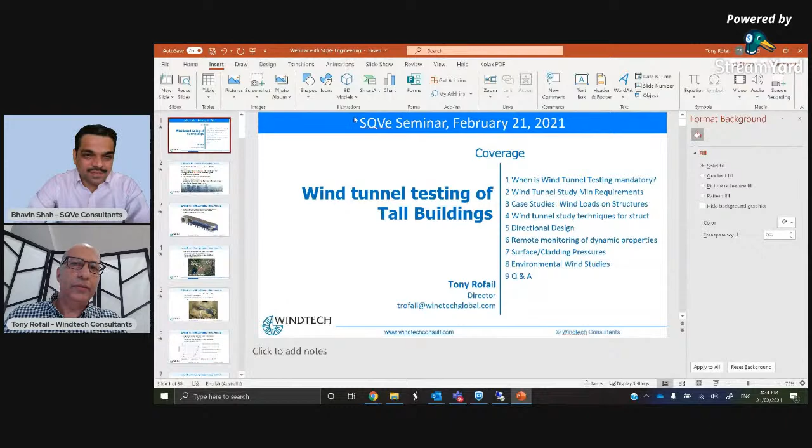Okay. Good. So you can see your screen now. I'm going to show you the overall structure of my presentation. Am I sharing my screen now? Your screen is showing now. Now it is there on the screen. Okay. All right. Good. So I'll just start now. All good? You can see the screen?

You can see that we want to cover a few topics today, all around the subject of wind tunnel testing for tall buildings. The first one, which is a very important question, is when is wind tunnel testing mandatory in India? Next is some basic requirements that need to be fulfilled when undertaking a wind tunnel study. Then I'll go through a few case studies, and then I will elaborate on some different wind tunnel study techniques for the study of the dynamic response of tall building structures, and which technique is best for what type of building. The fifth topic is quite important because it does impact the final result in a significant way, and that is how we account for the directionality in the wind climate.

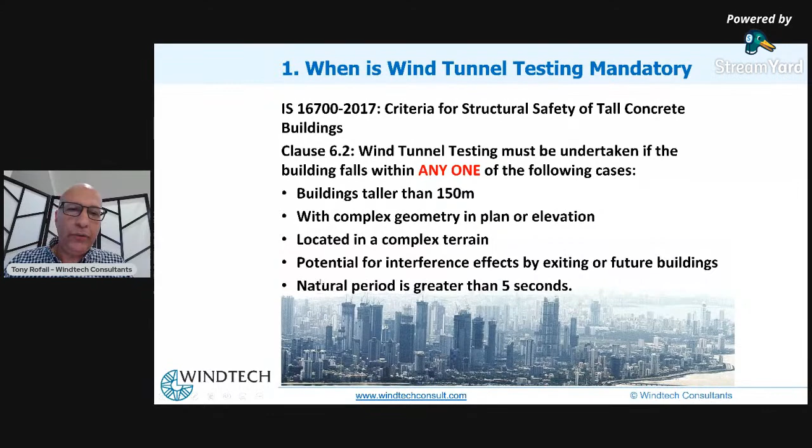Also, whenever the natural period is greater than 5 seconds, the crosswind response becomes very sensitive to the shape of the building, and the codes can't really accurately account for any small changes to building shapes, and hence the need for wind tunnel testing for that situation.

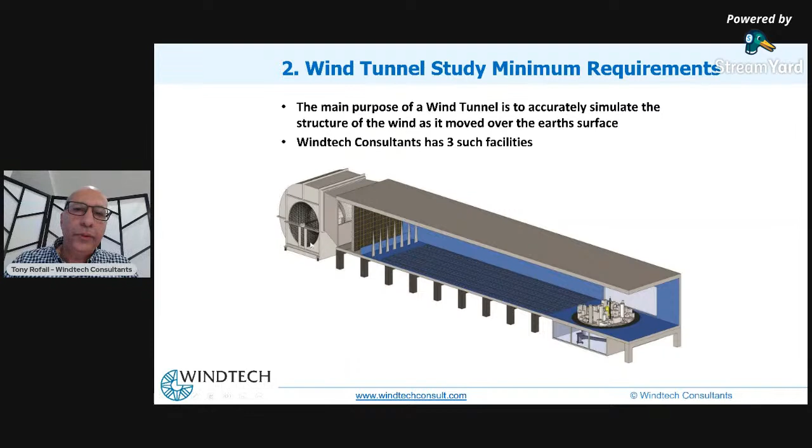Okay, so next topic is minimum requirements for a wind tunnel study. Firstly, I need to highlight what is the purpose of a wind tunnel. A wind tunnel's aim is to accurately simulate the structure of the wind as it moves over the Earth's surface. So this is one of the 3 wind tunnels at Windtech Consultants, this image here. And what is the terrain that we aim to match in the wind tunnel?

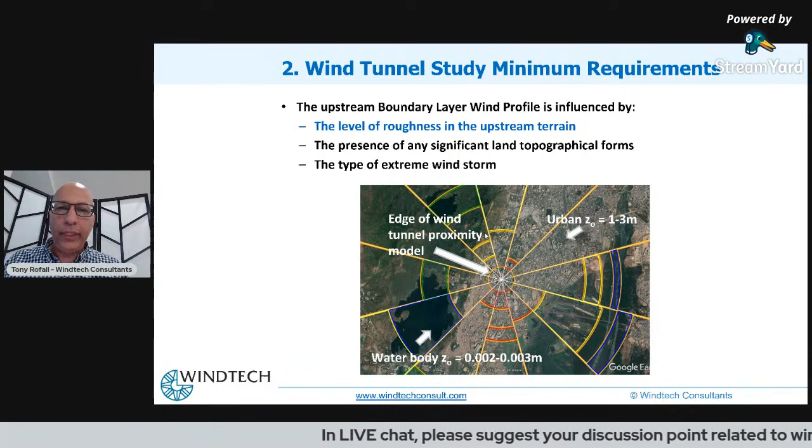It's very important for the wind consultant to be able to convert these different terrains into a combined wind speed profile, and then match this in the wind tunnel. So this needs to be done for different wind directions, and they're not, as you can see, necessarily all the same terrain. So it's important that the different terrains are modeled for the different wind directions in the wind tunnel.

Okay, if you are located next to a significant mountain or hill, then these are much larger systems and can't be modeled based on the limited size of a wind tunnel. So the solution is we do what is called a topographic study. This is a much smaller scale to be able to capture the full extent of these mountains and to see what effect they have on the local wind climate. So what we do is we then modify the local wind climate to account for the effect of these significant terrains before we do the testing in the wind tunnel at the normal scale, which is typically 1 to 300 to 1 to 400 or 500.

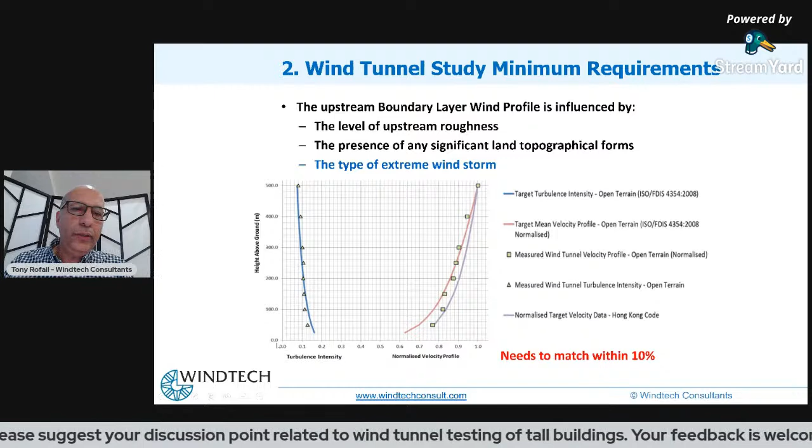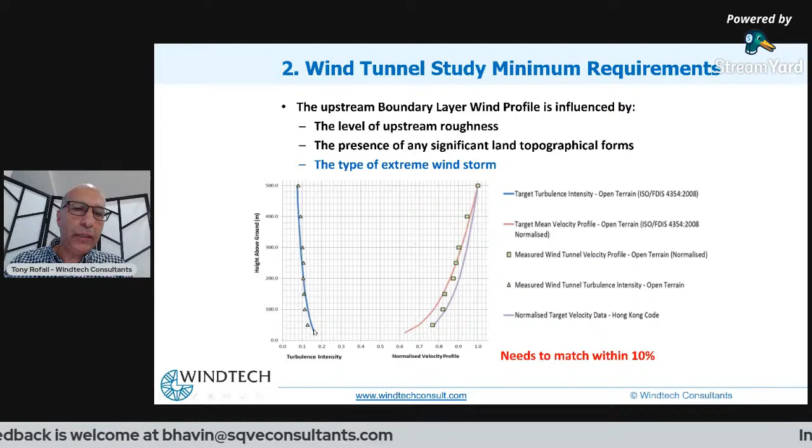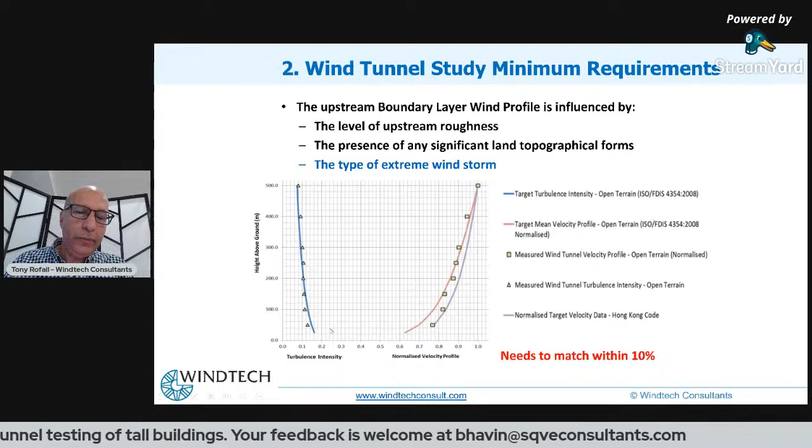Now in the wind tunnel, we aim to simulate some very key parameters that are in the real world. So this is the height above the Earth's surface, and this is actually the coefficient of turbulence intensity. You can see here, as we go higher above the Earth's surface, the turbulence intensity reduces, and the rate of this change in turbulence intensity depends on the upstream terrain that we are trying to model. So for this particular case, we have an open terrain, and we're trying to simulate that in the wind tunnel. You can see the triangles is the wind tunnel recordings against the benchmark value, which is the blue. And the mean wind speed also picks up with height, so different to turbulence. And that also needs to be matched in the wind tunnel. Okay, and these need to be matched to within 10%.

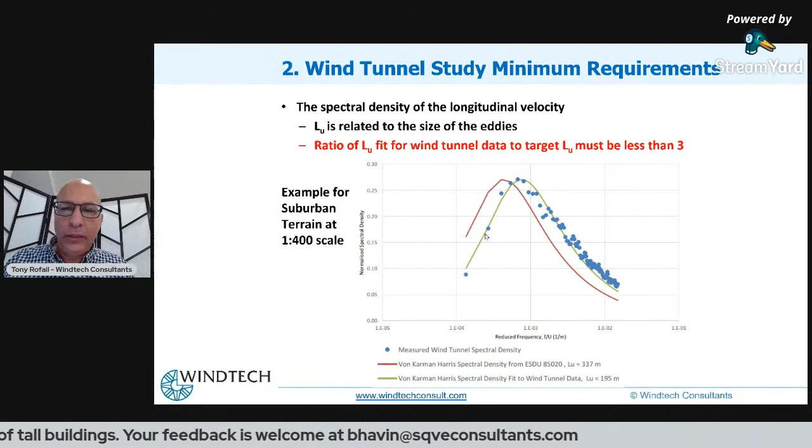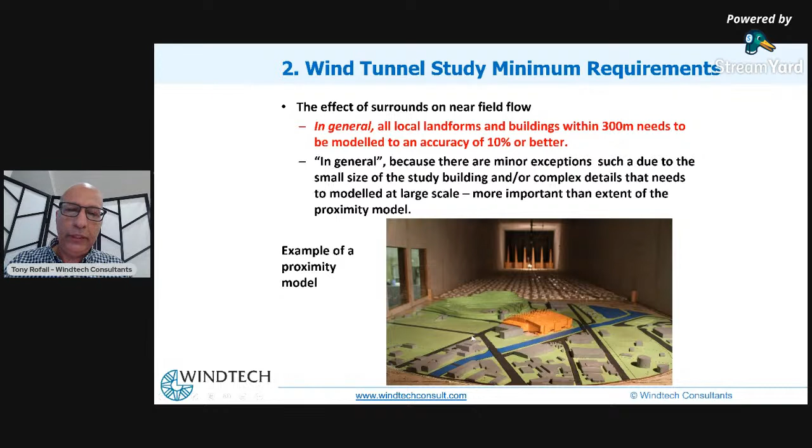Okay, the other important factor is the accuracy of the surrounds, the accuracy of the study model, and if there are any topographic features within close proximity, they should also be modeled. You can see this example here.

Another important parameter is that the cross-section of the entire wind tunnel model, including the proximity model, should not exceed 10% of the wind tunnel cross-sectional area. The reason for that is if it becomes much bigger than that, the blockage will start to influence our results. There will be a speed up at the test location, which would unnecessarily exaggerate the forces and pressures and speeds around the study model.

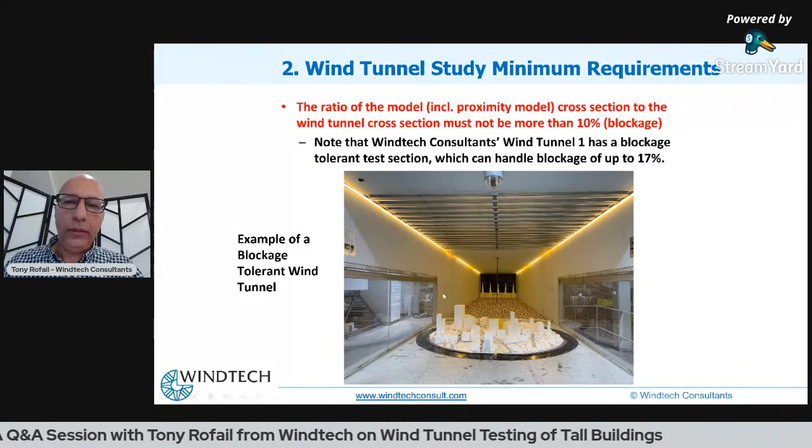Now, you'll see in the ceiling section here a very interesting detail, and this is called a blockage tolerant test section. So this is in one of our 3 wind tunnels. We have this feature which allows us to accommodate more than your typical 10% blockage because of the ability of these carefully designed slats to release some of the build-up of pressure at the test section due to large blockage. When the blockage is not large, it behaves like a sealed ceiling. Okay, so in this situation, we can manage a blockage of up to 17% of the cross section, although we rarely need to test scales that require this.

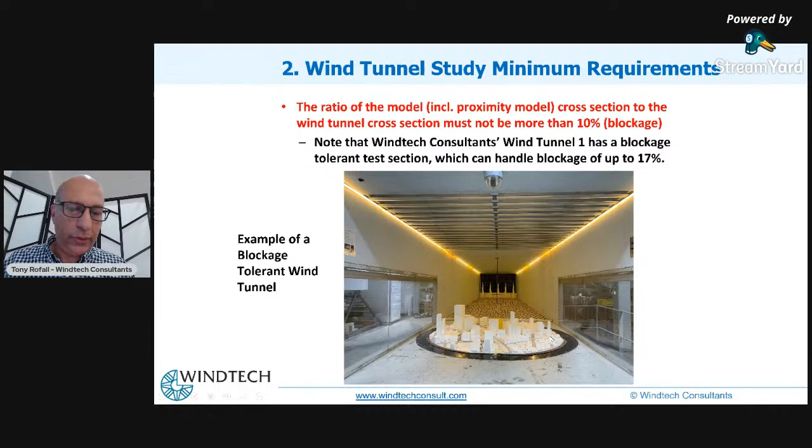Another important parameter is to have the model large enough, which is the opposite of what I just mentioned. So there is a balance between having the model small enough so it doesn't cause blockage, but also needs to be large enough so that it creates an accurate simulation of the flow regime around the building.

Okay, and the wind speed needs to be high enough. So this combination of wind speed and dimension, which is model dimension B, and mean wind speed in the wind tunnel U, and that's at building height H, divided by the viscosity constant of air is called the Reynolds number. So it's a very easy calculation, and any engineer could easily check the Reynolds number of the wind tunnel setup.

And a very important parameter is that this number must be greater than 50,000 for any cross section in plan, for any plan shape. For circular plans in particular, these are more sensitive to Reynolds number, and they would generally require a higher number than 50,000. Okay, and typically we recommend greater than 800,000. So these need fairly carefully planned experiments to ensure we get this much higher Reynolds number.

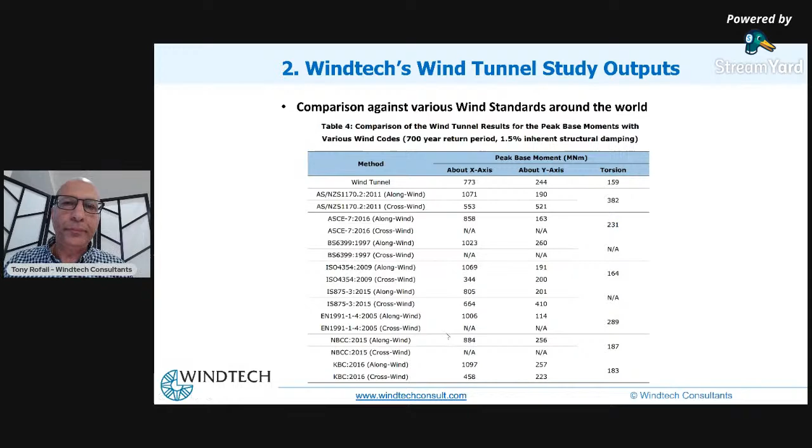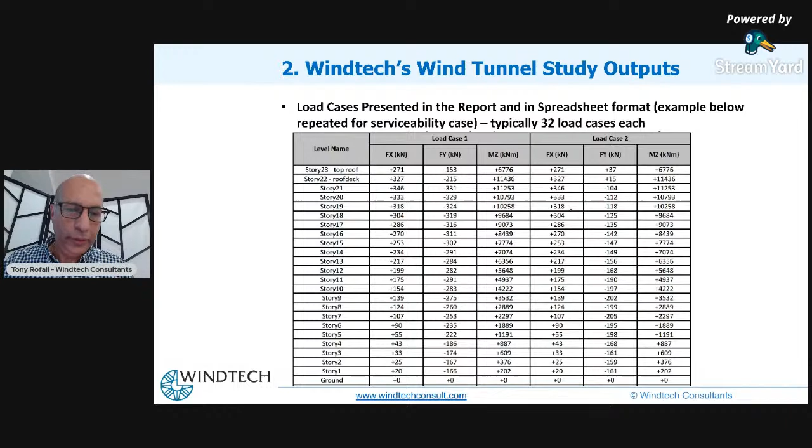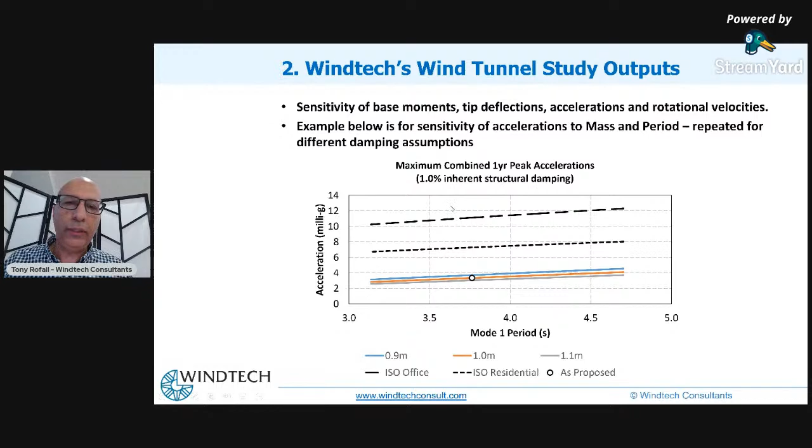Now we move on to a third topic, which is a number of case studies, some interesting case studies, and some of the lessons that we can learn from these examples. So you could see here, this is an interesting building in Australia. It's still currently the tallest building built.

It's called Q1 Tower. This tower has a sharp nose, you can see here, which is pointing towards the prevailing wind. And it's very aerodynamically shaped with respect to the prevailing wind. So in Surfers Paradise, the wind is very predominantly from the southeast direction. In addition, you can see some stepping in plan as you go up. These two features make this building form very efficient in terms of aerodynamics, and loads were relatively low for a building of this height.

And I'm seeing results for buildings shorter than that in the Gold Coast that are proposed, that are about 50% higher in terms of base moments. So it just gives you a bit of an idea how shaping a building for aerodynamics makes a big difference to the overall cost of the project.

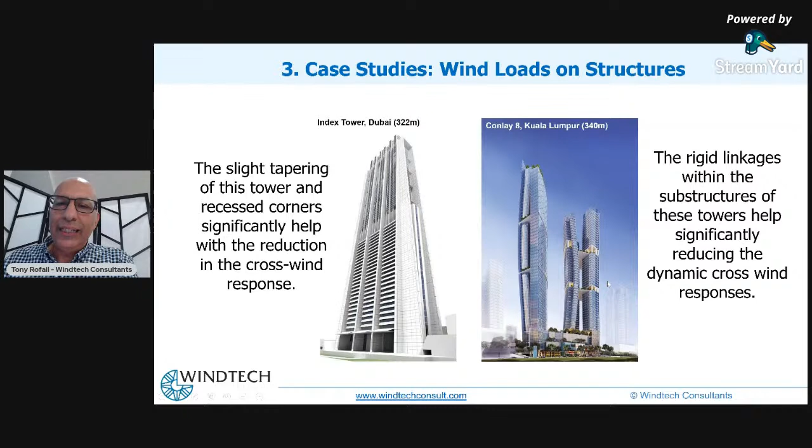So Windtech have developed what is still considered the state-of-the-art analysis method for accounting for this linkage between substructures. So we call each of these towers a substructure of the total structure. And this is largely because when the peak load occurs on one of these substructures, it hardly happens simultaneously with the other one. So what happens, the other one acts as a buttress to stabilize its mate, if you like, that it's connected to. So we tend to see significantly reduced overall dynamic responses because you're getting a much larger generalized mass engaged for a lower peak response.

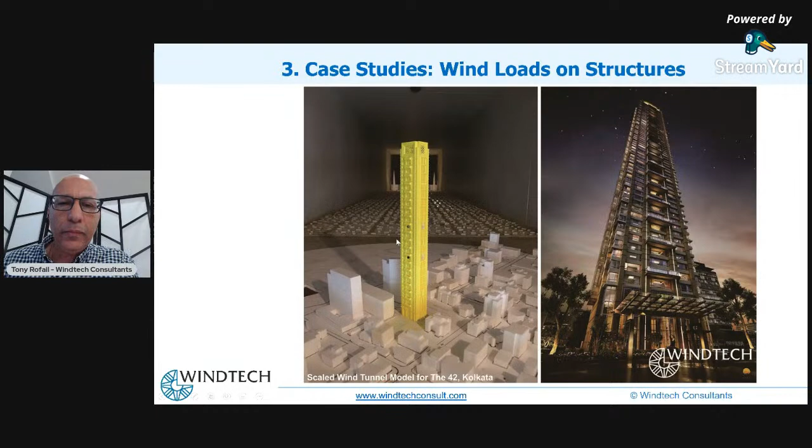Okay, this is an interesting, very slender tower in Kolkata, and you can see, apart from a little bit of a corner treatment here, we're not seeing any tapering, etc. As a result, we had an acceleration exceedance in this building, and the solution was a very simple and cost-effective damper design, which was implemented near the top of the building in the form of these two stacked tanks. These tanks could also double up as a fire hydrant tank for the building. So that's essentially very simple and cost-effective. If you factor in that this building would have had a fire hydrant tank anyway, then the cost is almost negligible for a damper.

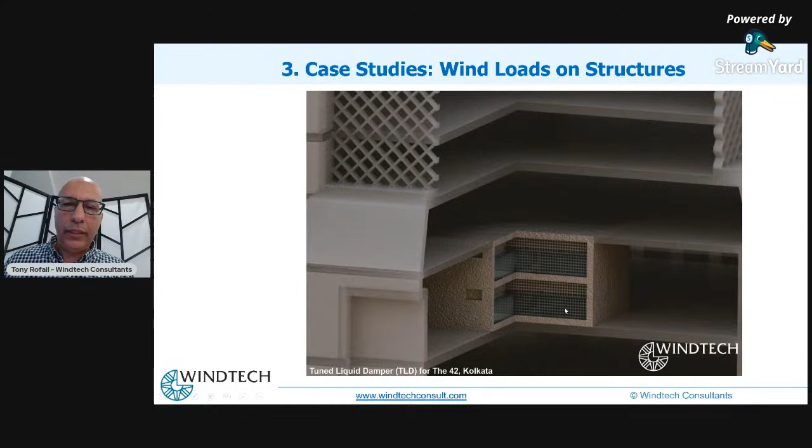Now, if you speak to other wind consultants, I know at least one, you would find that they would want to be pushing multi-million-dollar solutions, which would not be much more effective than this. Keep in mind that this system is able to mitigate accelerations in both X and Y sway modes simultaneously. It's a very clever system, very cost-effective. To achieve that kind of result with systems such as a tuned mass damper or hummingbird or whatever, you would be paying 5-6 times as much and not achieve, at least for the weight, a much better outcome.

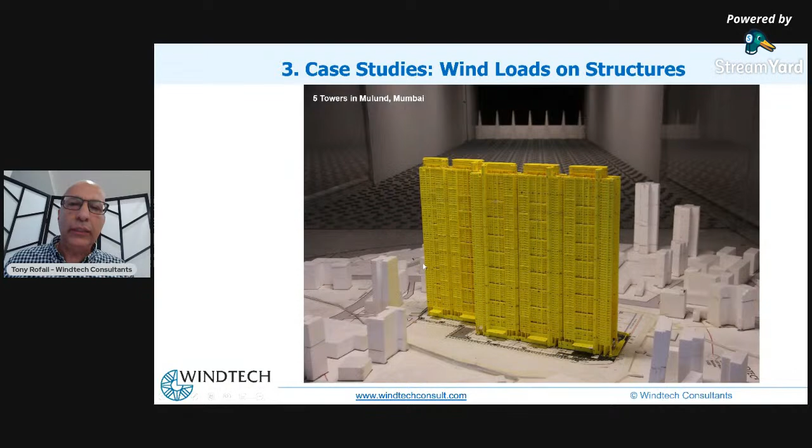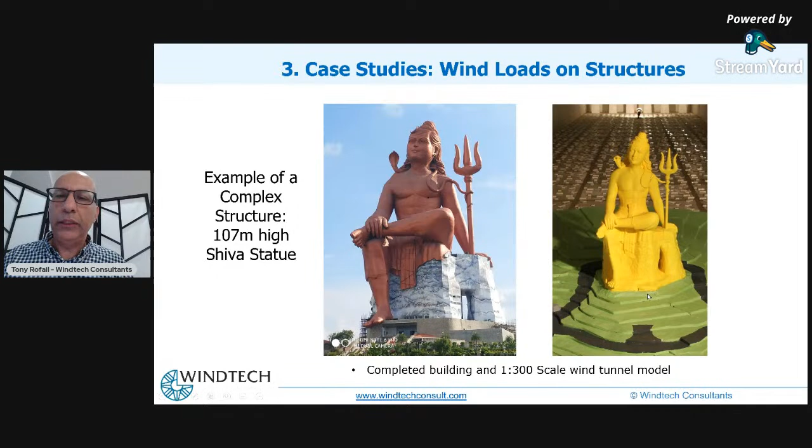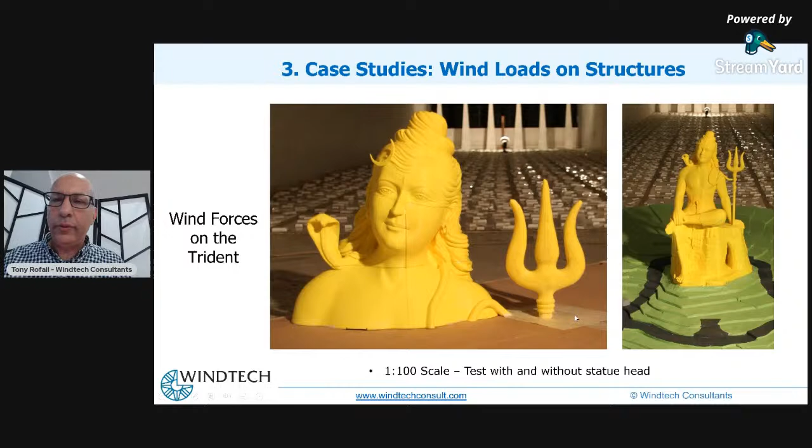You'll notice there's the Trident here. This Trident is not a structural connection to the building, so they were concerned about its dynamic behavior. If you recall, we would have an issue with Reynolds number here, because we have wind speed and dimension. The dimension here doesn't satisfy the Reynolds number requirement for accuracy of flow regime. For that reason, we needed to model that Trident at a larger scale, not ignoring the influence of the rest of the statue on the forces on the Trident head. So it's very important not to ignore modeling parameters such as Reynolds number in your wind tunnel studies. It's very important as a structural practitioner that you recognize these parameters for accuracy.

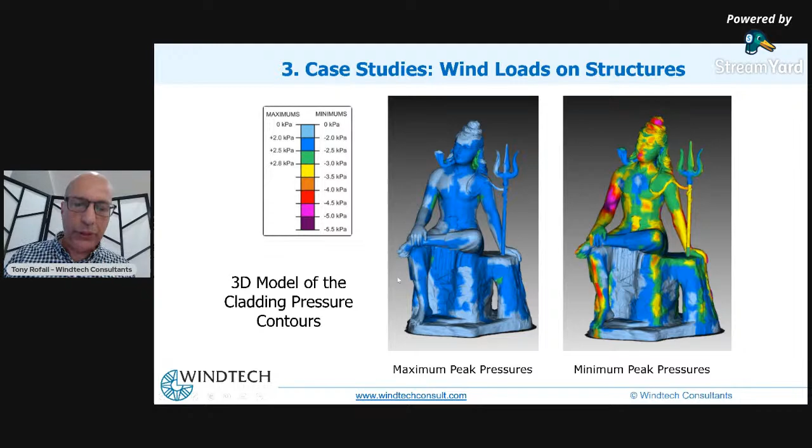You can see here, in addition to the structural response, we are able to provide the maximum peak pressure on the cladding and the minimum pressure distribution. These are global. For each point there, we look at the effect of 36 wind directions, and you get the largest peak value at each point, and that becomes a design value for cladding. Unlike structural response, where we look at the overall contribution of the pressure distribution on the load effects.

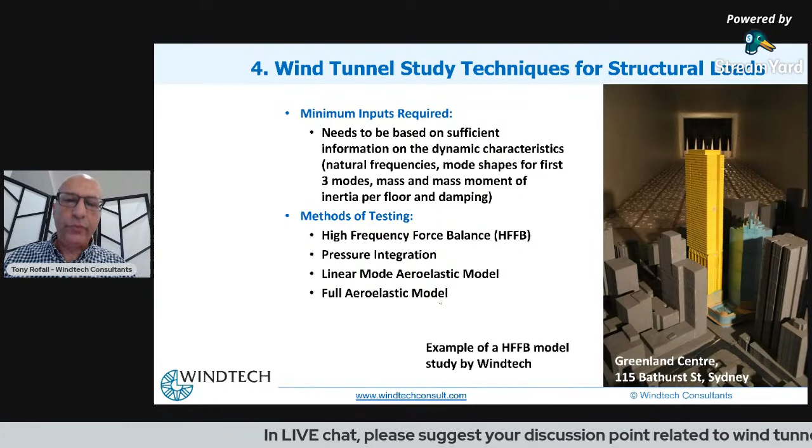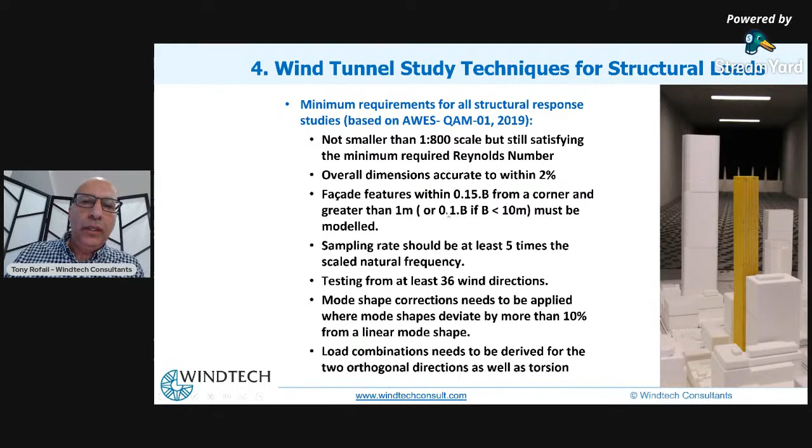There's the full aeroelastic model, used where you have a super tall building, more than, say, 500 meters in height, or perhaps even more than 600, where you can get significant contribution from the higher order modes on the overall load effects. For the basic minimum requirements, if you want to know more, I encourage you to go to the awes.org website and download for free the quality assurance manual, the 2019 edition, of which I was a main author. It spells out in a simple but detailed way the important key parameters. I'm not going to bore you with these details; I suggest you read that document.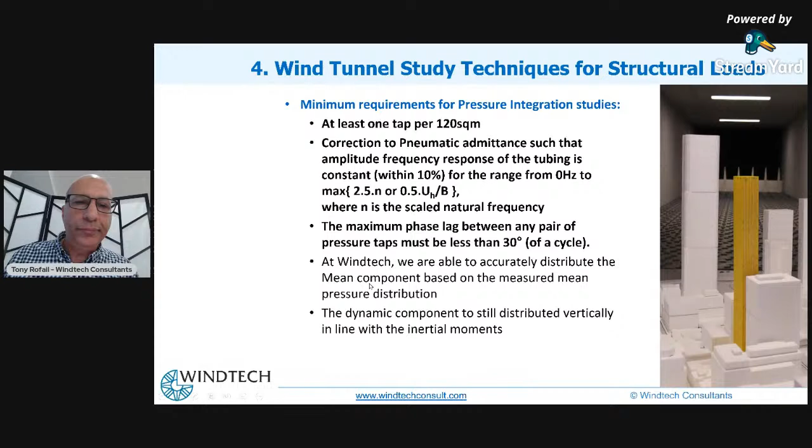Aeroelastic models. The model needs to be able to have a natural frequency in the two translational modes in the same ratio as the full scale, to within 5%. So if your second mode is sway about y of say 0.3 hertz and the first mode is 0.2 hertz, then that 1.5 ratio needs to be replicated in the model.

So other important, the next most important would be the mass of the model itself. It needs to have the same structural density as the prototype building. So these are the two most critical. Also, the inherent damping in the model needs to also match the inherent damping in the prototype building. So I'm going to cover in a minute which types of buildings this is particularly important for.

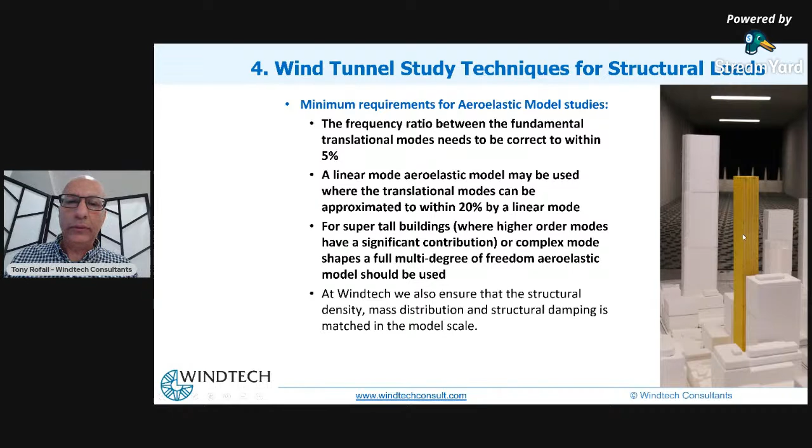The answer to that is when you have a reduced velocity greater than 8. Reduced velocity is the mean wind speed at building height divided by the natural frequency of the first mode of vibration, and also in the denominator the characteristic width, which is the narrowest overall width of the building. Particularly if the building has steps, then it'll be the narrowest overall width in the top half, or you can take the average in the top third of the building.

So this doesn't happen very often. It happens if the building is particularly high, so you get a very large mean design wind speed at building height. If it's very slender, then you have a very small B, so that also tends to push up the reduced velocity. So this is for the vast majority of buildings that wouldn't fall under this category.

If your building happens to be hexagonal, octagonal, then the phenomenon that requires this type of study, which we call aerodynamic damping, starts to kick in at a lower reduced velocity of around 6. For circular or elliptical buildings, it starts from a 4, which is why you don't see many super tall buildings with a circular or elliptical plan. But for 95% of cases, you wouldn't need to go to the extent of an aeroelastic model.

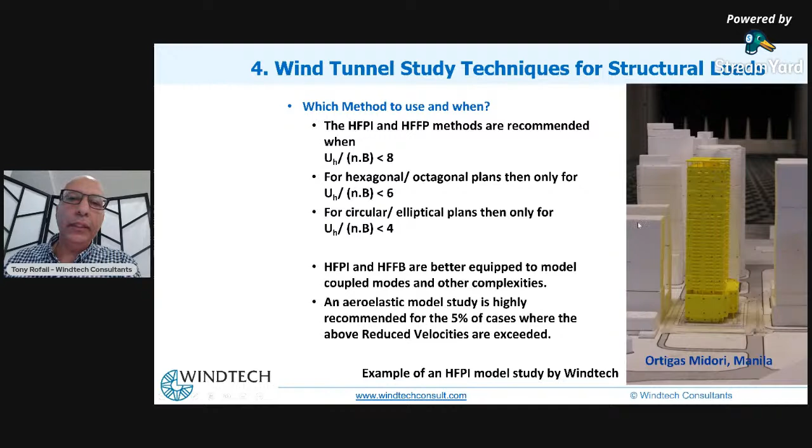What we do at Windtech is the aeroelastic model doesn't necessarily replace a force balance or pressure integration. It's done in addition, and we overlay the two results. And you can see here the aeroelastic results show some increase, which we call negative aerodynamic damping. So the aerodynamic damping is negative, meaning it subtracts from the inherent damping, so you get a lower overall system damping and hence the increased amplitude.

But it rarely happens in the critical angles of attack. So here, no effect. For a square-shaped, circular, or hexagonal building, it could actually occur in the critical angle of attack. And for the other axis, you could see there's actually a positive aerodynamic damping, so it's actually made an overall reduction to the response of the building here.

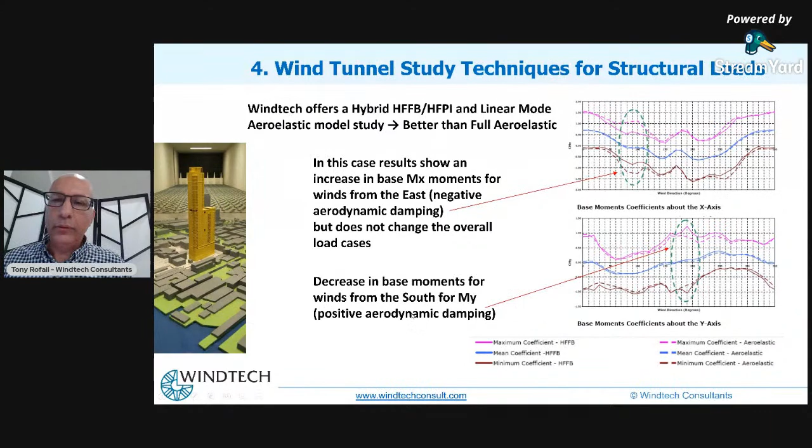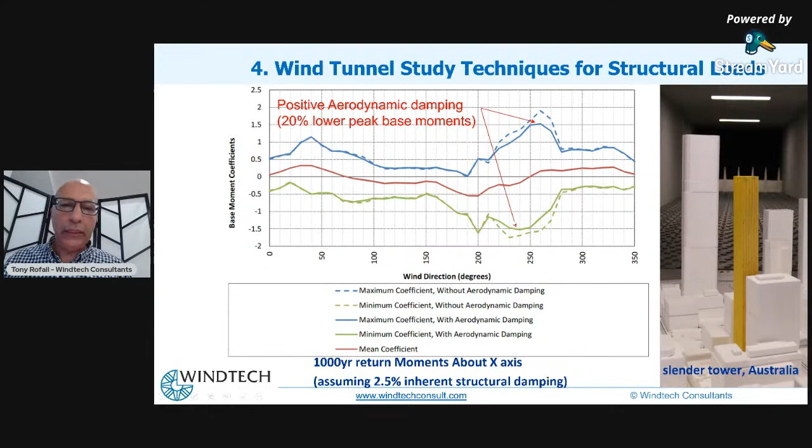You can see that building was subject to positive aerodynamic damping. It's sort of like a square uniform plan shape. And you can see that there's roughly a 20% reduction in the ultimate base moments, and even bigger reduction for the 10-year return, also in this case 25-year return deflections. Okay. This is for one axis.

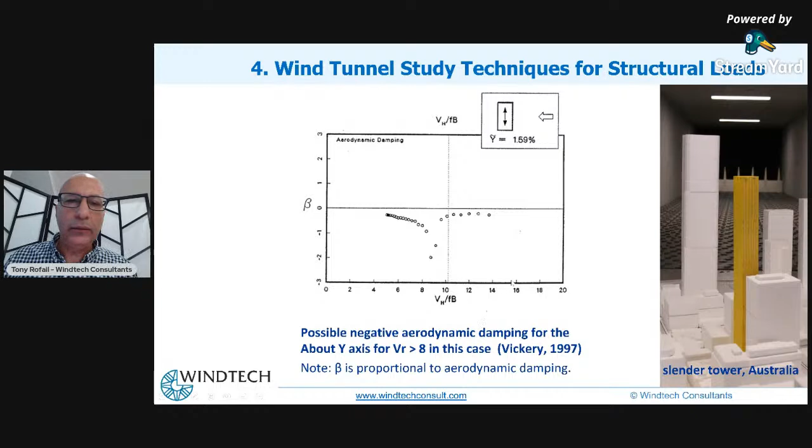For the other axis, which is the about or along the longer side, we didn't see much of a change. Okay, some slight increase here, but not from the critical angle of attack, as we saw in the other example.

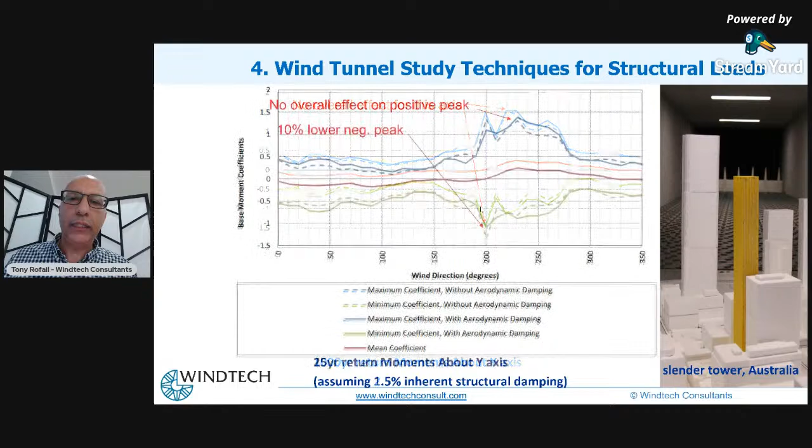Now, this is an interesting example of a tall building where the incorrect, well, actually, it's interesting because we tendered for this particular project and the tender brief was correct. The tender brief correctly specified an aeroelastic study to be undertaken for this building. But the winning wind lab ended up winning on price. We found out later why they won on price, because they actually cut out the aeroelastic scope from their tender.

As a result, loads were overstated, and there was quite a lot of difficulty experienced by the structural consultant in making this building take the load specified from this particular wind tunnel study. And shortly afterwards, this project was put on the market.

One other thing that Windtech can offer to our clients is a performance-based wind design approach. This is achieved through the way we incorporate the directionality in the wind climate, but also we can offer, if the structural consultant is able to set up a transient dynamic model of the structure, a time series that they can input rather than a fixed static load.

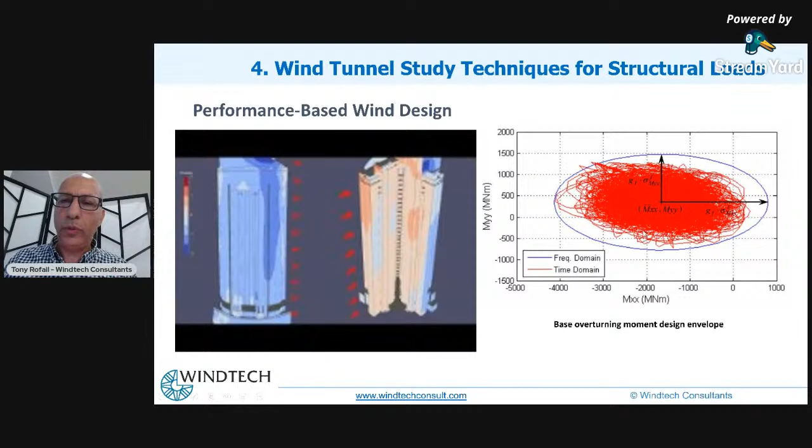Okay, so I'm going to skip this next section because I think I'm running out of time here. So we'll try to cover this in a different presentation perhaps, but this covers why it's important to analyze in particular way the effective directionality.

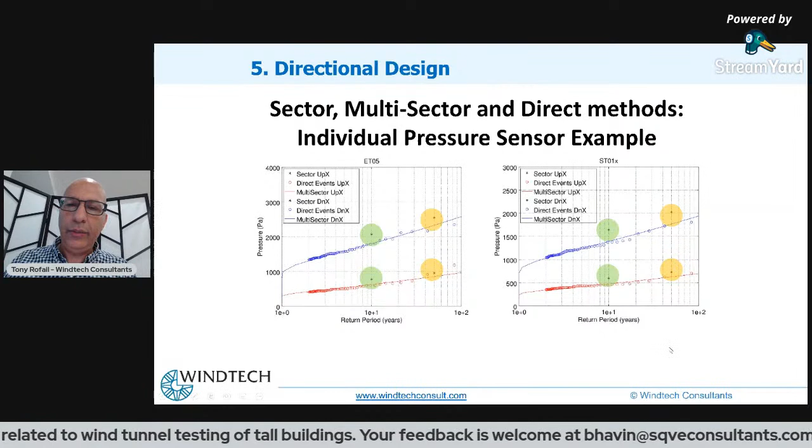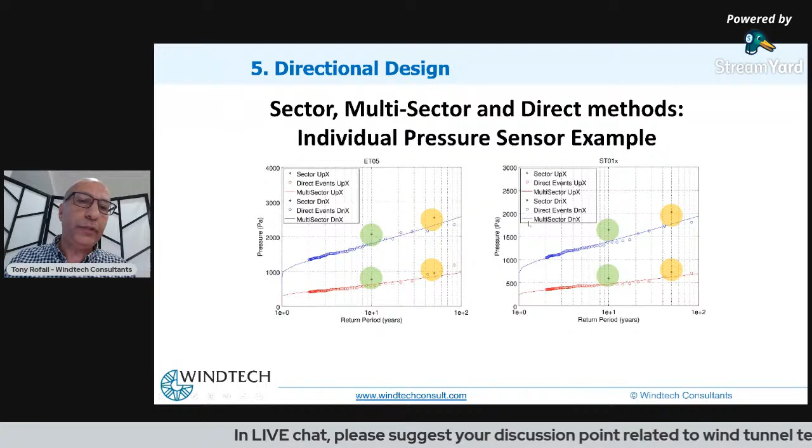So what comes out of the wind tunnel, if you follow the quality assurance manual requirements, you'll get very similar answers, but it's also very important to be aware of what is being done to these aerodynamic coefficients to arrive at your design pressure or design base moments.

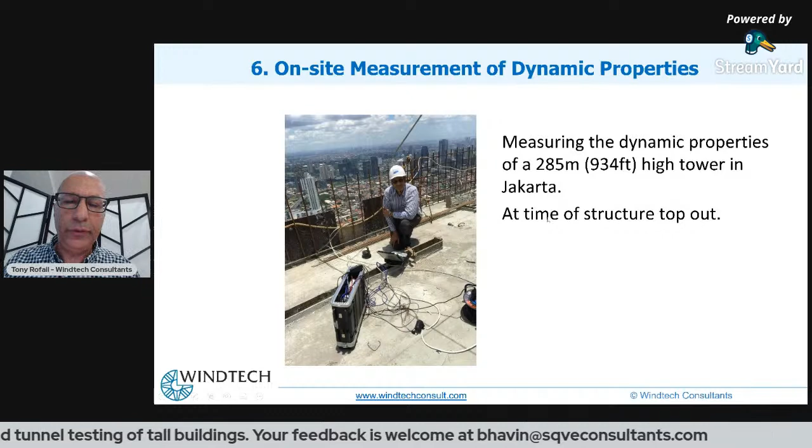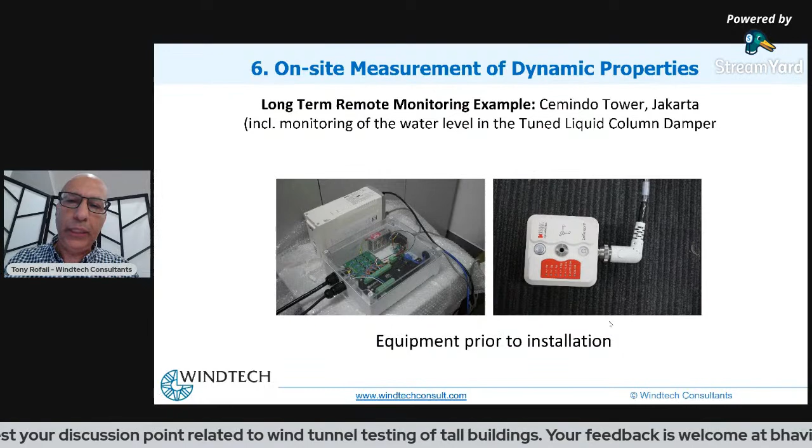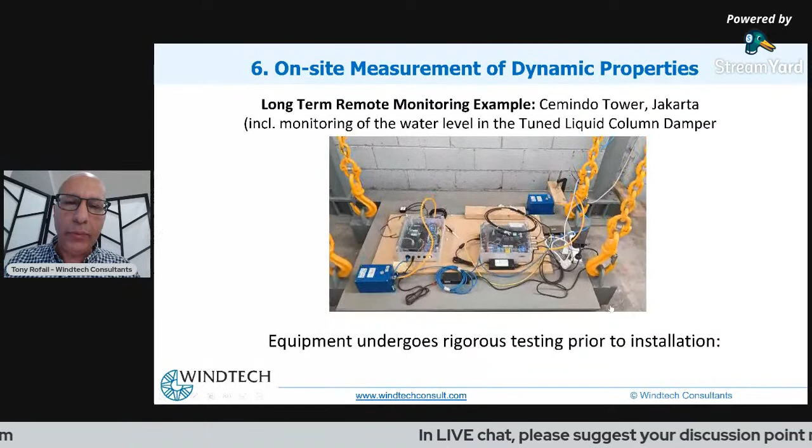Okay, on-site measurements of dynamic properties, that's something that we can offer if you're interested. Also long-term monitoring. We use very sophisticated hardware that we've actually built in-house using some leading sensors. We're measuring in micro G, so you imagine the sensitivity we can achieve with that. And these systems are tested rigorously in our facility using simulated building motion before we actually send them off to the site. This is an example of an installation done in Jakarta.

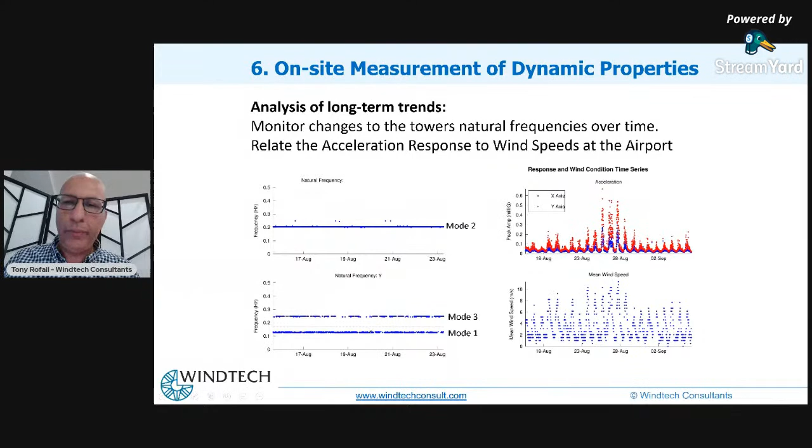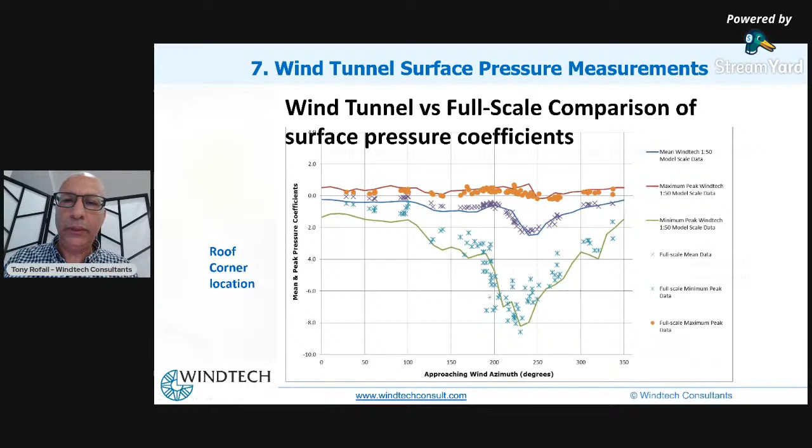And this is roof corner, a very particularly challenging part of the building to get close to full scale. We are able to do that at Windtech. Why? There's a very long story behind how we achieve that. One of them is to measure the pneumatic response or admittance of the tubing system itself and correct for that.

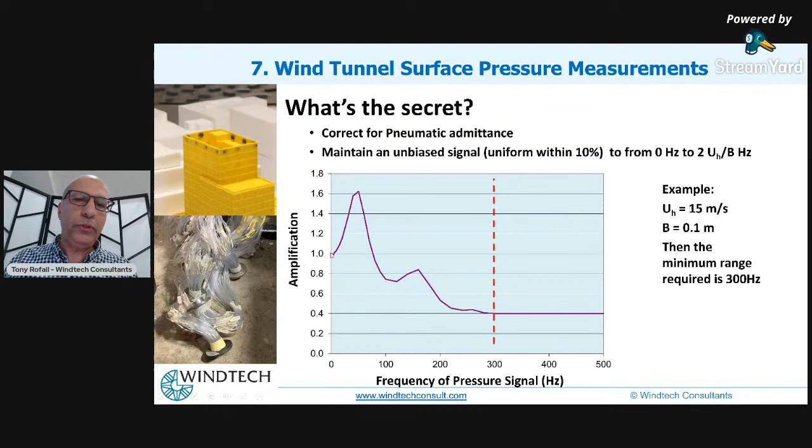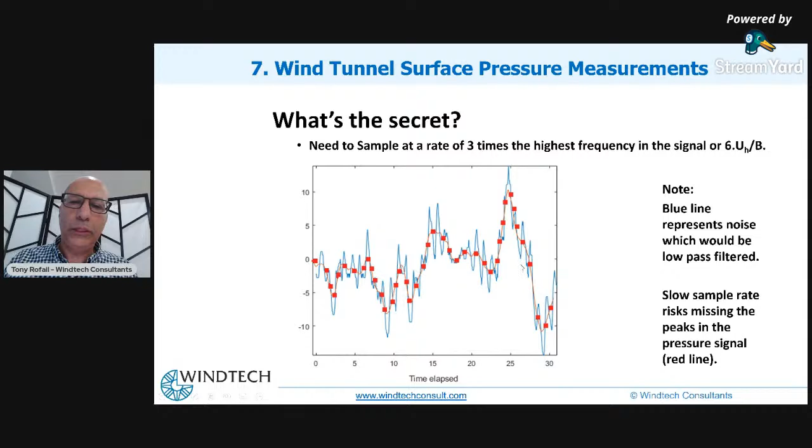We low pass filter beyond a certain point, we make sure there's not too much noise in our system. So this is not from our equipment. Our equipment doesn't have that much noise, but this is just to illustrate what could happen if it does have noise. Also, how fast we are sampling, the number of dots per second, is very important to map the target signal, which is the red or orange line in this example.

These red zones typically in the code will be applied generally across a much larger area in the building. So this allows you to gain some cost benefits by designing for the area where they actually do occur, rather than everywhere in the building. In fact, these numbers themselves are a bit lower than all of the corner positions on the building. So significant cost benefits can be achieved from a cladding pressure study.

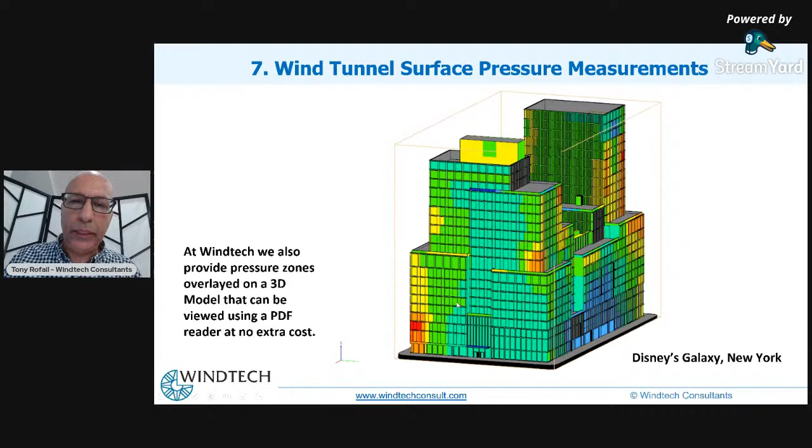Wind environment study is very important, particularly if you want to ensure comfortable conditions and, more importantly, safe conditions on all balconies, not just for pedestrians, not just for occupants being able to keep themselves from falling under strong winds, but to ensure lightweight furniture doesn't end up flying off and hurting some people on the street, which can happen. Okay, so these have big impacts on the community.

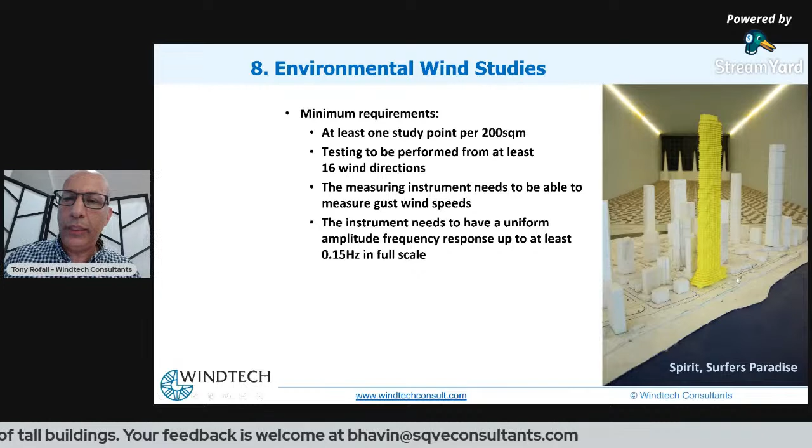So we have had a number of developers, such as Lodha and others, who have insisted on undertaking these studies in India. So we'd like to see more people consider these effects. In Australia, this is a mandatory requirement for every single new development. And depending on where you are, once the height exceeds anywhere between 6 levels or 15 levels, wind tunnel testing is mandatory for this.

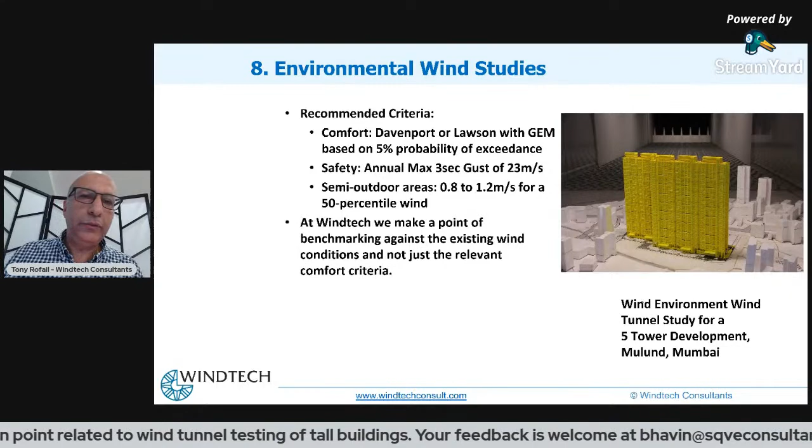Yeah, thanks, Tony, for the excellent presentation. So you covered from basics to very detailed about the wind tunnel testing, and I'm sure there are many interesting questions which will be coming out now. So firstly, we have received a few interesting questions from the social media. So let us take them one by one, and thereafter we'll be taking a few interesting questions which are already popping up in the live chat.

Yeah. So one of the questions we received: what are the materials which are being used for creating the model in the wind tunnel test, and how could it affect the results? Okay, so it depends on the type of study. If you're doing a section model of a bridge, there's usually an aluminium section spine, and then we have either balsa wood or foam body over the spine.

If we're testing a force balance model, some wind consultants use a foam model fitted on a shaft like a glove. At Windtech, we use a 3D printed model using a very rigid type of resin to get the high natural frequencies that are very important. This question is particularly important for dynamic models or a force balance. If you're doing a force balance, as I mentioned earlier in the presentation, your model needs to be quite rigid so you don't interfere with the zone in the spectrum that you are trying to derive your response from.

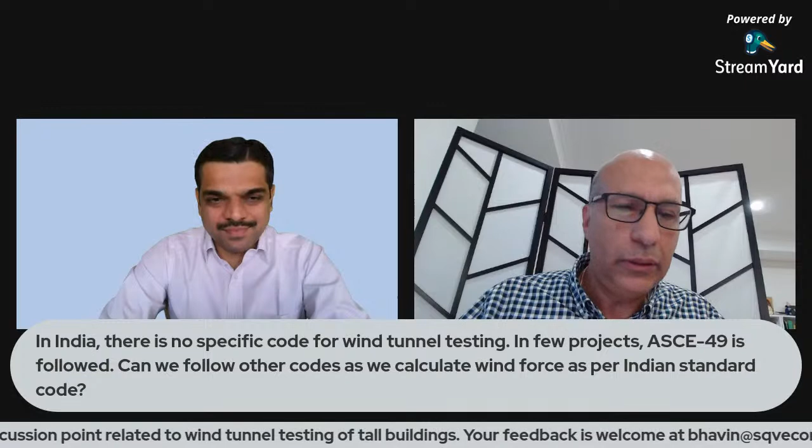If you are looking at codes generally, just to design to a code, then what you should do is stay with the Indian code, because it's actually a very, very good code. In my view, it's far better than the ASCE 7-16. At least it gives you a good treatment for crosswind response. We tend to find it goes in quite well against our wind tunnel results in general, obviously within the constraints stipulated in the Indian standard, as I presented earlier at the start of my presentation.

One more question we have received: if wind tunnel test results indicate that the wind forces are to be increased by 10%, let's say for the across wind, is it also required to increase the along wind forces? No, not necessarily, because the crosswind behaves in a very different way to along wind. It's very shape dependent. You can get a building with the same along wind response, same width, but twice the crosswind response. The fact that the crosswind has increased by 10% doesn't necessarily mean you need to increase the torsion and the along wind. Absolutely not.

However, you need to be mindful of the minimum loads stipulated in the Indian code, IS 16700, which says you can't go below 70% of the code value. So if you need to bump up one by more than the other to get to the minimum 70%, then that's the Indian code's requirement.

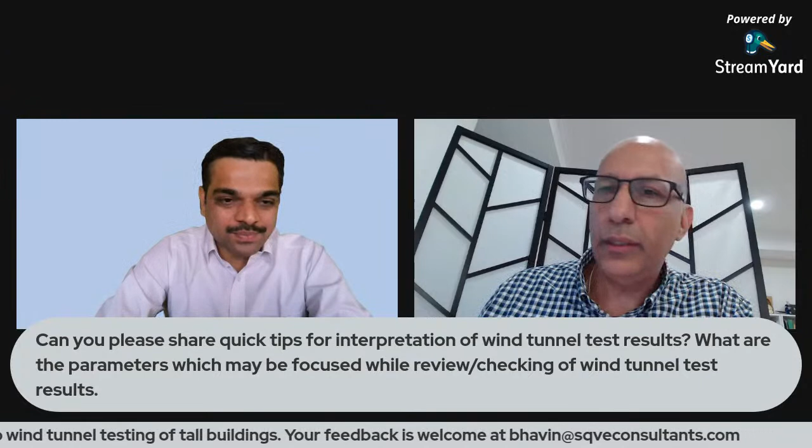Sure. Okay. I'm going to share my screen. Okay. Let me just see if I can do that now. Can you see my screen? Yes, we can see now. Okay. All right. So,

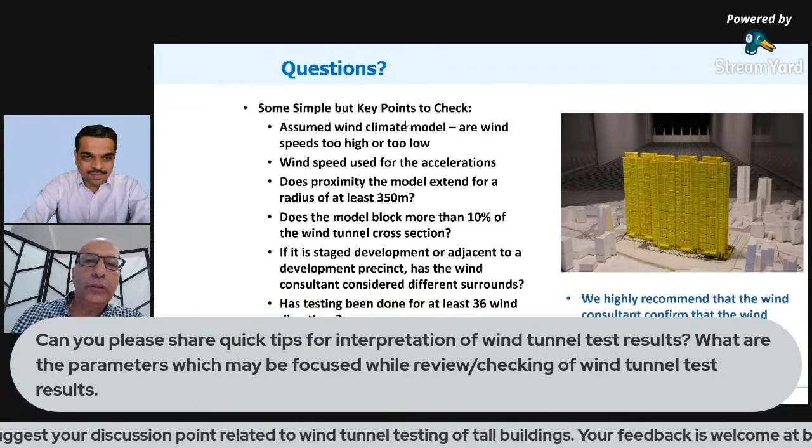Bhavin sent me this similar question earlier, and I have done a summary here. These are very simple points to check. First of all, you need to know what was the assumed wind climate for the wind tunnel study.

For any structural engineer, do not let the wind engineer give you results without clearly laying out what their assumption is with the wind climate, whether it's for the ultimate loads or the accelerations. Equally important is to know what wind speed was assumed for the accelerations. You have a right to know this. You have a right to question them if it's significantly different to the Indian standard, because ultimately you are the person responsible for the design. So this is a very important one.

The proximity model needs to be extensive enough. I would say at least 350 meter radius. Check the blockage. You can tell that by looking at the photos. You've seen some of the models I've shown, zoomed out. This is a zoomed in view, so you can't tell, but most laboratories need to show a zoomed out view. And if you sense that there's likely to be more than 10% blockage, you need to question that with the laboratory, because that would indicate there's potentially an overstating of the loads and pressures.

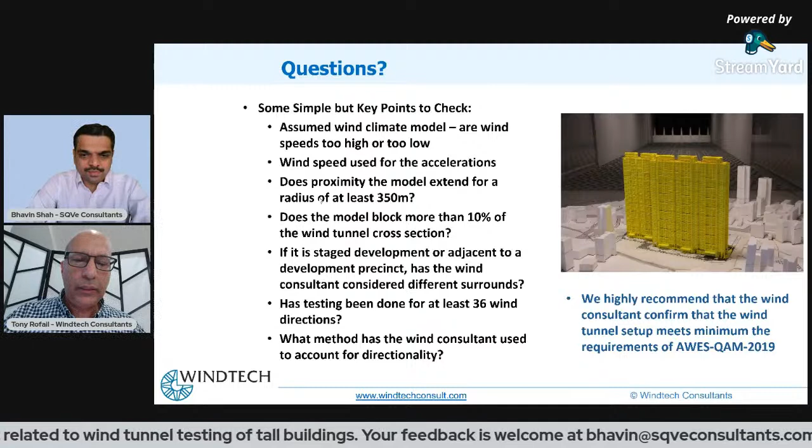Also, this is not really a check as much as something that should be part of the tender brief. If this is a staged development and you're planning to stage it over more than 1 year between each stage, it's very important that the wind tunnel lab undertakes testing for more than one different surrounds case. One for the scenario where we know what the surrounds will be at the time of completion or near completion, and then a future surrounds for the future stages. Or if the site is located adjacent to another development precinct, you need to include that as a future surrounds, unless that development is more advanced than your project, then you can treat it as part of the existing surrounds. Very important because these can have a big impact.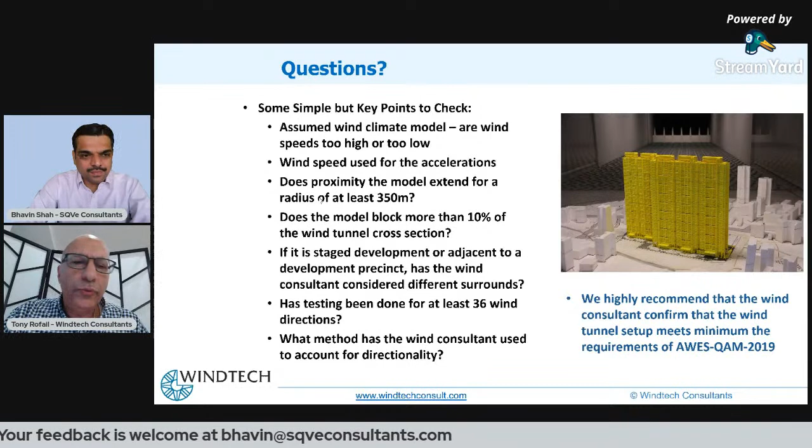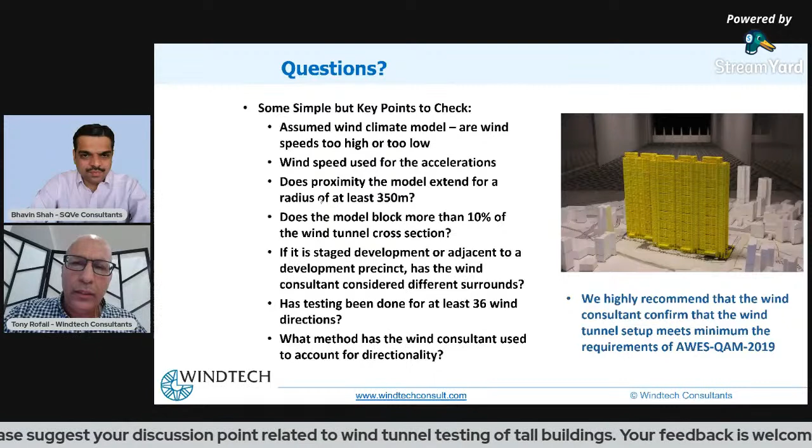Also, it has come to my attention that some wind tunnel labs test very few wind directions, and that is dangerous. So you need to make sure that at least 36 wind directions have been tested, in 10-degree increments, for both structural and for pressure. Not necessarily for wind environment, because the gradient in the wind speed with direction is not as dramatic as you could potentially get with dynamic response or pressure. You can get very big changes over 10 degrees. It needs to be captured with the 36 directions.

And finally, a topic I moved through quickly, but you need to have at least some idea of how the wind consultant accounted for the directionality of the wind. Some wind consultants just totally brush this topic aside, go with the Indian code, say for Mumbai 44 meters per second, and assume that for every wind direction. And you end up having to design for a load that's far, far more than what it should be. Your client will end up paying a very costly price for a fairly cheap and nasty study. So you need to understand what the allowance for directionality in the wind climate was, and what method was used.

There are three main methods that are currently used. One is the sector method. The sector method is very similar to the code. You take different angles of attack and you see which gives you the largest load effect. It's a much simpler method, but then they need to have done their homework in terms of the climate analysis, not just assume the same speed in all directions. Then there's another one, the outcrossing method. The outcrossing method is a bit more rigorous, but usually what we found when we peer review this particular method is that the accelerations are significantly overstated. So you would very likely get a recommendation for a damper at the end of this study, where it's very likely that you won't be needing a damper.

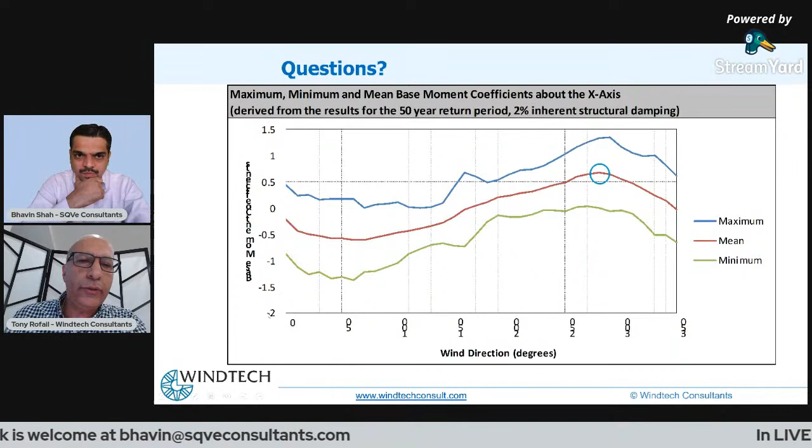Right. And another couple of points which are not covered by the AWES QAM, but are based on a good understanding of bluff body aerodynamics. If you look at this plot of the coefficient, sorry about the label here, it didn't come out well, that's the wind direction in 10 degree increments, from 0 to 350. 0 is north, and these are the base moment coefficients. These are translational moments, and this is the mean coefficient, maximum and minimum. You should be able to be provided this in any structural load study report. You need to have the base moment coefficients for the translational and the torsion. You need to have a look at the mean.

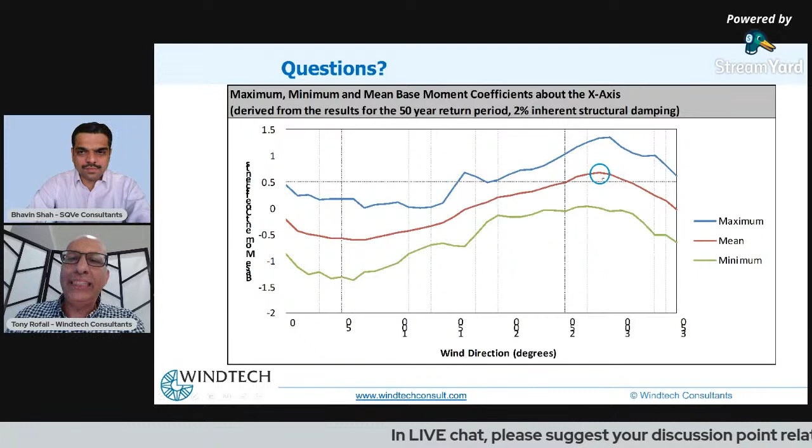This is an example of a case where we found pretty much very close to the maximum mean coefficient you would expect. In most buildings you'd be around plus or minus 0.5 or 0.6. Here we've got about 0.67. That's really about the highest you would expect, but you should not see much higher than that. If you see higher than that, you know there's something wrong with the wind tunnel setup. So that's one very simple check you can do.

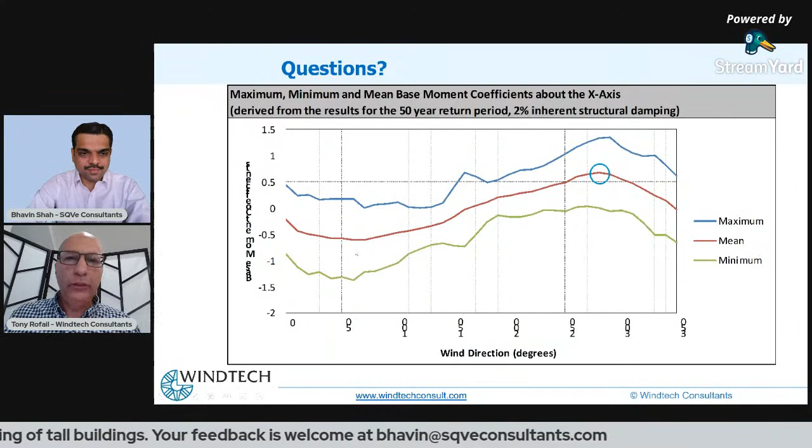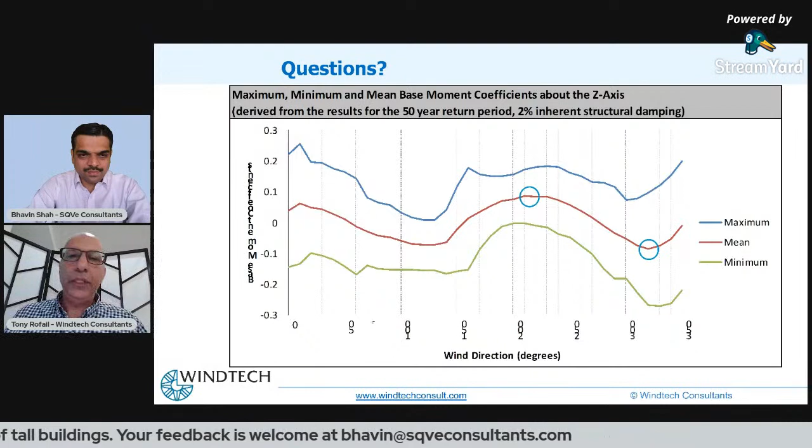For torsion, the mean coefficient should not go beyond plus or minus 0.1. Can you see those? This is the mean torsion coefficient. Remember, it's a coefficient, and the coefficient is defined relative to the height. It's normalized by the height of the building and usually the longer horizontal dimension. So based on that, this red line here, or orange, should not go beyond plus or minus 0.1. If it does, there must be a very good reason. Usually there isn't a good reason, actually. So that's a good rule of thumb for the average structural engineer.

Okay. Any other questions? Yeah, this is an interesting question. In the initial presentation, we discussed that wind tunnel testing is required, let us say, for height more than 150 meters, right? So now the question is, if we have buildings which are lesser than 150 meters in height, and wind tunnel testing is done to achieve better structural efficiency in terms of cost, or because the current codes don't factor in the desired parameters.

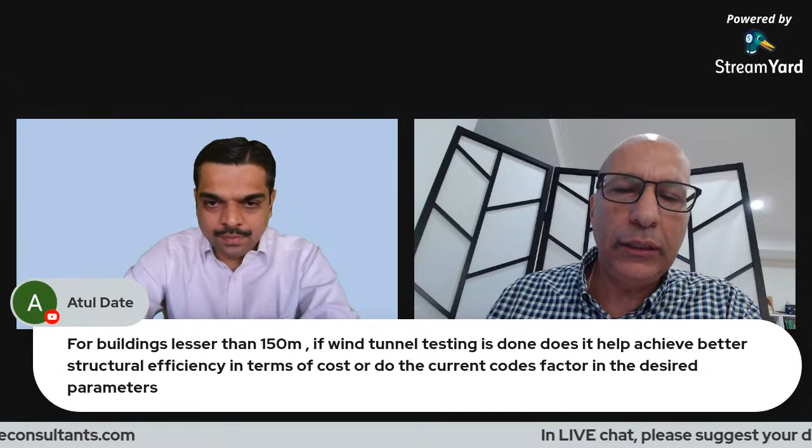Yes, this is done very often, actually. In India as well, we have done many buildings in the height range, typically from about 90 to 150. That's very common. We do a lot above 150, of course, but we tend to see very good efficiencies. Nearly every time they can gain a 30% saving on the structural load as a result.

One more question from Atul: is the wind considered to be in any particular direction, or does building orientation also play a major role? Okay, so I understand the question is about the importance of the building orientation with respect to the wind. Yes, as I mentioned with the Q1 tower on the Gold Coast, if you orient your building, depending obviously on its shape, you would get a lot of benefit.

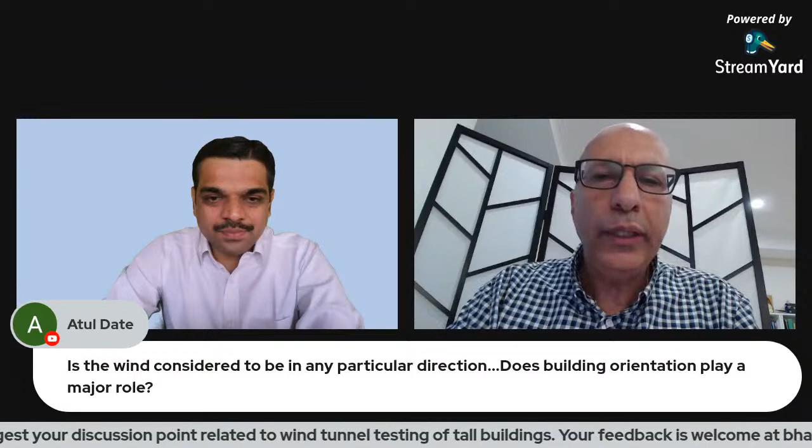So at Windtech we're very happy to have this dialogue with the architects early on in the piece to help give them some guidance on how shaping can make a very big difference before the concept design has been locked in. And that's usually the best time to get the most out of the wind consultant, actually.

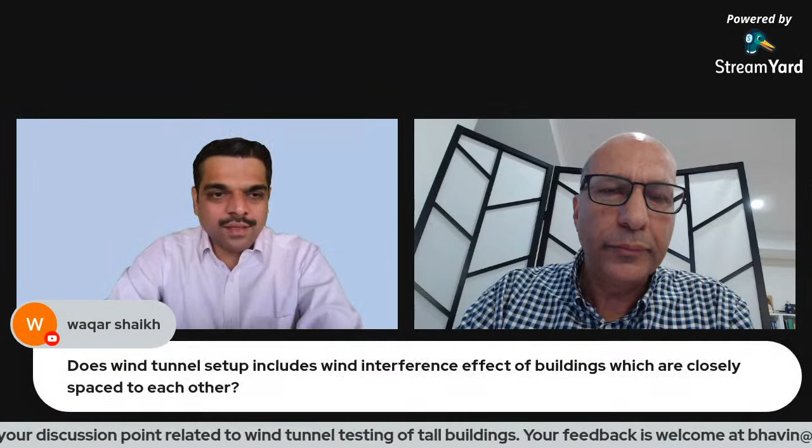Okay. One more question from Waqar Shaikh, that does the wind tunnel setup include wind interference effect of buildings which are closely spaced to each other? Yes. So the interference effects depend on, yes, the spacing of the buildings has a big impact on interference, and the more closely spaced the buildings are, the greater the effect of interference.

But if you have a 300-meter high tower, it's not likely that it'll be surrounded by 300-meter towers everywhere. So if you only need one other 300-meter tower somewhere within 300 or 400 meters from the site, you can get some very interesting interference effects. So just be aware of that.

If your tower is relatively similar to a dense population of towers around you, you don't have to worry about interference. However, if you're sort of the next block near the coast, and there's another building, only one building or two upstream, just beware, because there could be some significant interference. So it depends on how much you're standing out amongst the crowd of towers with respect to the wind, okay? Because you only need one wind direction where you're actually not shielded by a large number of other buildings. Right.

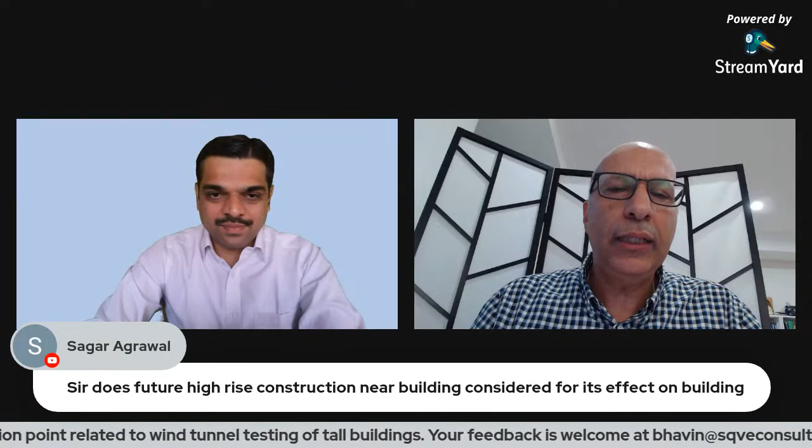My advice is you let us at Windtech make a postulation as to what massing could occur and test that as a hypothetical future case. It's better than ignoring this problem altogether. And we've done this before.

Professor Mayank Ghoshal has asked an interesting question, that how winds are generated in the tunnel, either through fans or by other means. Oh yeah, we use very large fans. We have our own substation. So we use a lot of energy to keep the wind going.

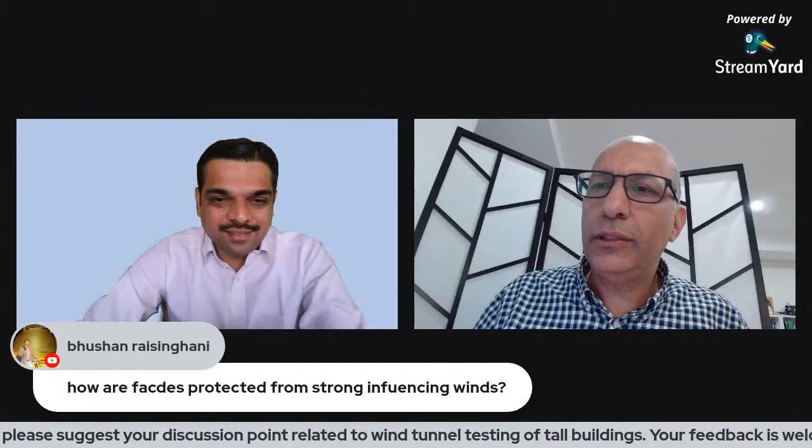Bhushan has put up one more point, that how are facades protected from very strong influencing winds? Sorry, how are what protected? Facades. So he's talking about facades, the exterior parts of the building. Sorry, I'm not seeing the question. Oh, facades. Okay.

So if you are in an area such as Kolkata, where you are likely to get a significant storm, like, for example, recently we had Cyclone Amphan came and crossed Kolkata. These cyclones tend to generate a lot of debris. And it's very important that at least the bottom 25 meters of the building is designed to be impact resistant. Use a type of impact resistant glass if you are in a region that's affected by cyclones.

But other than that, if you have accurate wind loads and you have accounted for the effect of the surrounds, you've looked at the future scenario, then you have the best protection in terms of design for your facade, because you've accounted for all of the potential anomalies that may not be fully covered in the code. So we've seen zones where the area of the highest pressure zone extends beyond where the code stipulates to be the extent of the high pressure zone. And it could be just somewhere near the bottom corner of the tower. But the fact that you're able to pick that up from a localized model study provides a lot more peace of mind.

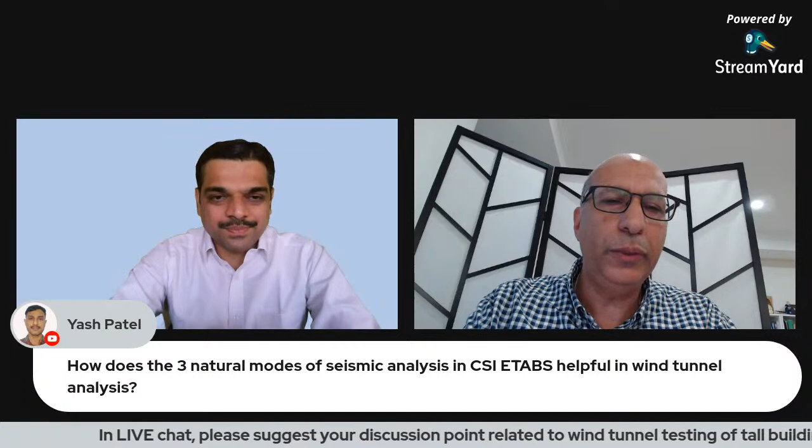If you have set up your ETABS model for a seismic analysis, obviously the extent of cracking is more extensive than for wind. So just be careful with that, because you'll get natural frequencies which are perhaps a lot lower than they should be if you had stayed within the elastic limit. It's not necessarily the same dynamic properties as you would have for a seismic analysis. So just be careful with that.

So you do account for some cracking for ultimate loads, but not to the same extent, I would say. I'm sure Bhavin can answer this question as well. As you rightly pointed out, there are stiffness modifiers which we have to enter for seismic analysis. Basically, we are considering cracked section properties because the structure will be going beyond the elastic limit. There will be certain cracks which will form, and because of that, we cannot consider the 100% moment of inertia. So it's a reduced moment of inertia which we consider in a seismic analysis. As you rightly told, it becomes relatively flexible, and directly those values cannot be utilized, because in wind engineering we want to restrict our structure within elastic limits, so there will be a substantial difference between the time periods.

With this, I got one more question. Do you define the time period by yourself, or do you ask the structural consultants to give the time period considering the 100% elastic properties? Yes, we rely on the structural engineer to either provide us his ETABS model and we can export from there, or they can export into a spreadsheet template that we can provide, whichever they prefer. Okay, so the closed interface is required for identifying the natural frequency, right? Yeah.